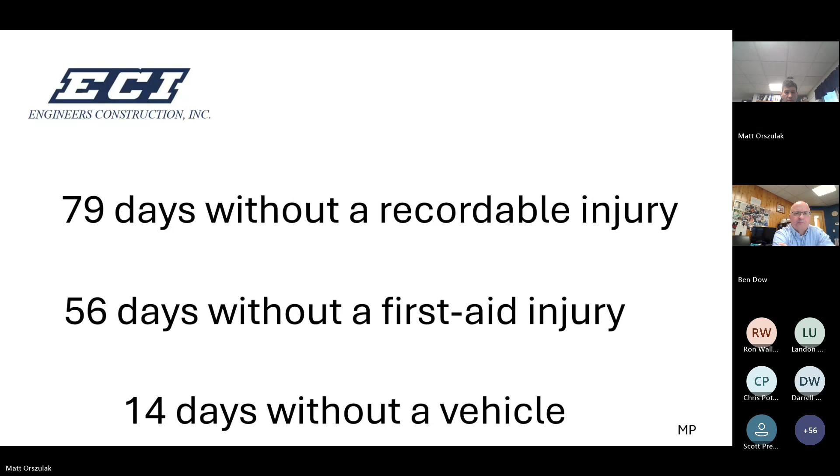So respect the marks is our topic. We're going to have Dave Attic here as a guest speaker next week to talk about Vermont Gas and what they're seeing. There's been a lot of gas leaks by contractors throughout the state so far early in the construction season. Luckily, one hasn't been us, but I thought it'd be good for him to highlight damage prevention.

Things that he's seeing contractors failing to do around Vermont Gas, but other utilities all together in the type of work that we do. So for us, what we can really emphasize and focus on is maintaining marks. Where we historically have seen some failures, it's been marked once, we forget where it was, and then we get into it with an excavator bucket.

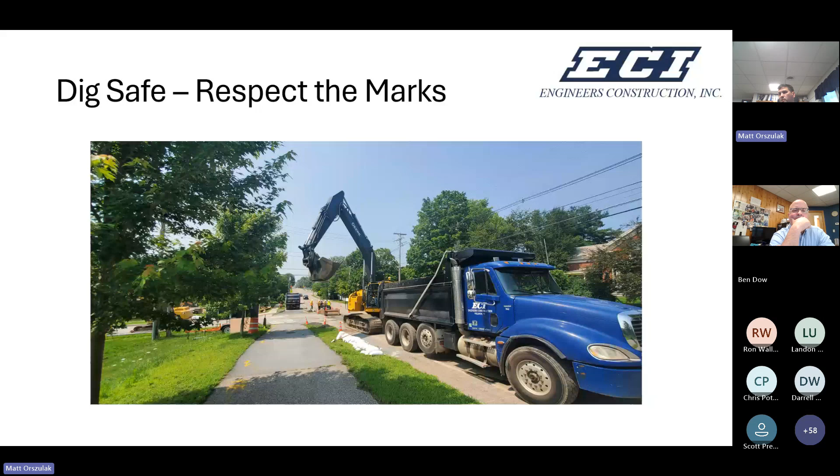Quick little slide here just on the state statute saying that we have to have a pre-mark. Our areas must be pre-marked before we call dig safe, something that we've done pretty good lately. We've definitely had our struggles with it in the past, making sure before we call in a ticket, we pre-mark it. So let's make sure we get those pre-marks done.

And again, go more than you think you need. Say it's a sinkhole and you make it really small and short, and then you start digging down in that area and realize, man, we need this slope way back because this thing's a lot deeper than we thought it was. So take more than you need just so we don't have to have another remark.

Because again, it's 3 days now. The new law is 3 days for underground utility companies to come out and mark out our stuff in our dig safe area. So make sure we're doing the pre-marks. Health and safety can help with that. If you plan ahead well in advance, we can help pre-mark our areas. But just let us know.

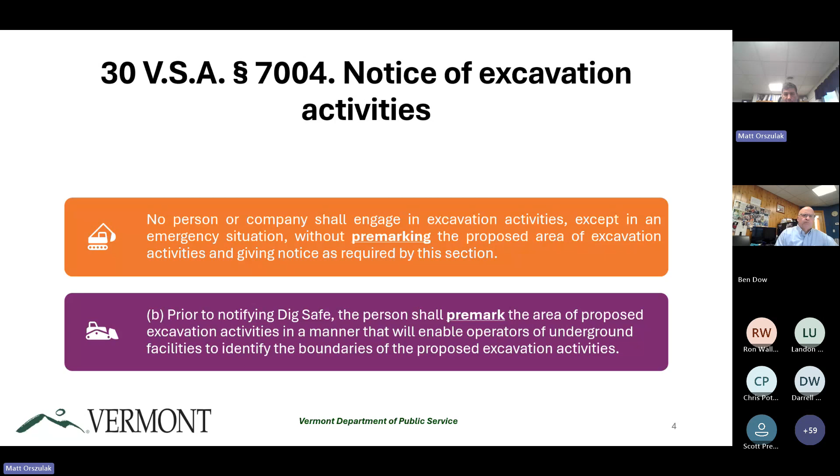So once the utility company comes out and does their thing, Vermont Gas has been there, Centerline's been there for the power and the comm. There's a couple other third-party fiber optic companies that hire people out of Connecticut sometimes, so they are usually the ones that trickle in. Most of that's kind of on the rail though.

But make sure we're holding that pre-construction meeting on site. Let's walk it first, try to take photos, try to get a feel for what you're dealing with. If you do want to have some depths, we have that technology with our underground utilities where we can help give you some depths. Establishing offsets is another good one to do.

And also utilize our GPS equipment. I'm sure if we have rovers available on site we can store some points, be able to reestablish that line utilizing our GPS equipment. As we saw last week, we have quite a bit of good technology there that can help with maintaining our underground utility conflicts.

So how the statute's written in the state of Vermont, and pretty much throughout the United States, it's the contractor's responsibility to maintain the marks. They will come out to refresh our marks, but they get 72 hours for a remark. So if we lose marks because of our mistakes, we could be delayed on our projects a little bit. So let's make sure we're doing what we can: grab photos, put grade stakes in the ground, GPS it, whatever we can do. Create offsets right in your field book so we can reestablish that mark, so we don't get into a power line or a comm line or a Vermont Gas line because we forgot, because that could be a big issue.

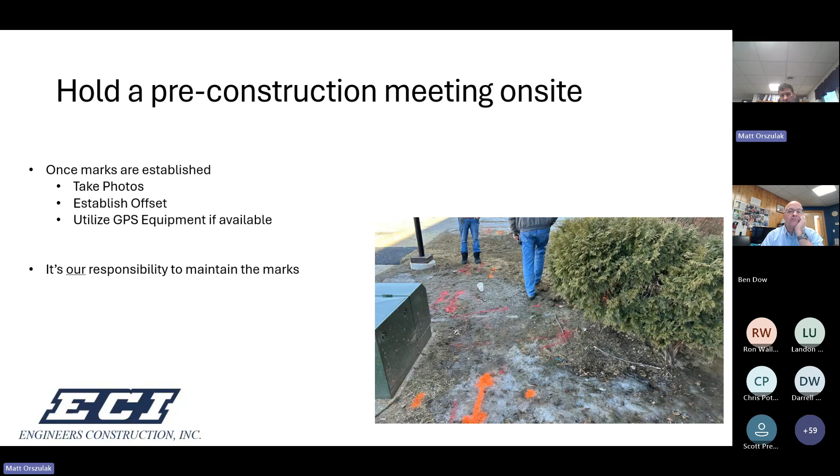We want to really make sure everybody knows the color code system. We do this in orientation, and then we highlight it every year. It should become common knowledge to everybody that when they see a red mark, that's electric. When they see yellow, that's gas. When you see orange markings, that's communication. Blue is your water lines. Green is your drainage and sewer. Pink is for us, for our surveys. And white is for our proposed excavation area. That's the universal color coding system for underground utility locating and proper use.

So we want to make sure we're paying attention to any changes in the direction of the lines. Where you usually get it is when a line does a quick 90 and we're running parallel with it, and it does a 90 into our trench line and we get it that way. So it's always good to hand dig ahead of you, potholing ahead of you, so you can always get depths and line as best we can anytime we're digging, especially if it's a direct buried comm line. There's not a lot of tolerance there.

For damage prevention, make sure everyone is involved and aware of any offsets or marks that have been compromised. If something changes out there, let's make sure we're communicating a good time at the tailboard. Those field books are very good for that as well, with communication and taking good notes, making sure everybody is aware, especially the excavating operator, and especially the person in the trench spotting for the excavating operator.

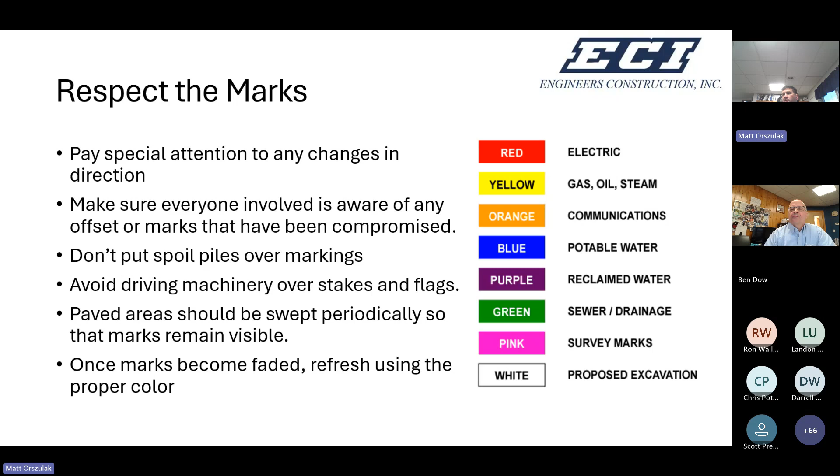Yeah, we have plenty of locating equipment readily available. So if your project has a lot of exposure to an underground utility and you want a locator on site, we will train you how to utilize our plug and play locators for keeping up with the marks, getting depths, and figuring out what is actually the live utility versus what is abandoned. Because that could be a lot of time sunk trying to figure out what that is and where it goes, so there are ways we can expedite that process.

The other thing that's frustrating sometimes is when you find a line and think you have it, but it's an old abandoned one. Then it's not the right one. That happens, just give us a call. We have a lot of contacts and resources at our fingertips that hopefully can get you the answers to your questions pretty quickly.

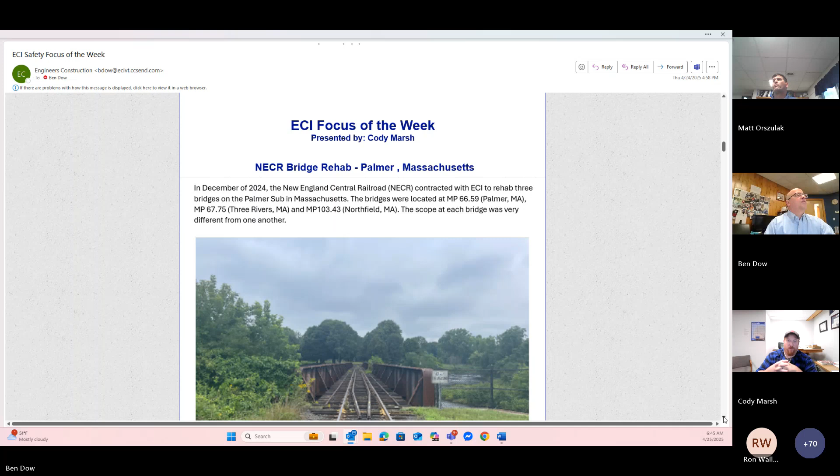Project of the week. Hopefully we're not too focused on my projects. We're going to do a deep dive on your projects. We're going to get some graphs out next week, Cody, see how you're doing. All right, nice. We're in ESOP now, so we all want to know.

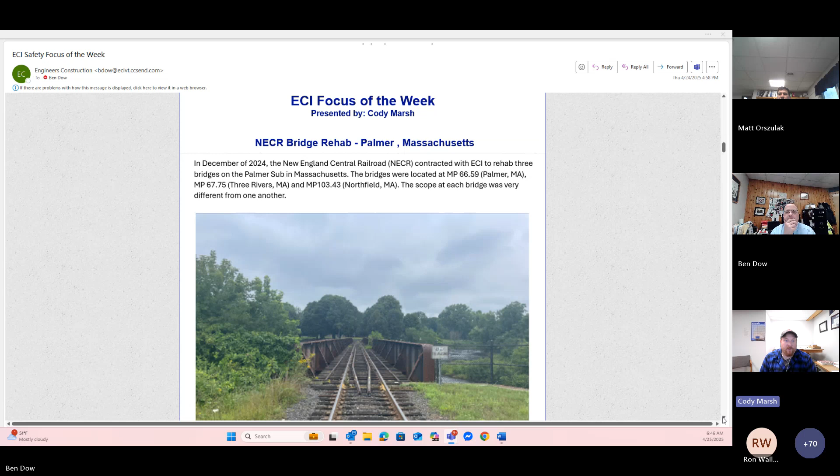This was for the NECR 2024 build grant project down in Massachusetts. In December 2024, the NECR contracted ECI to rehab 3 bridges on the Palmer sub in Massachusetts. The bridges were located at MP 66.59 in Palmer, 67.75 in Three Rivers, and 103.43 in Northfield. The scope at each bridge was quite different from one another.

This is the Three Rivers Bridge here, shown as the existing conditions looked last summer - a pretty beefy-looking through girder bridge. This is just down the road in Palmer, which looks like a lot of the bigger bridges we have in Vermont.

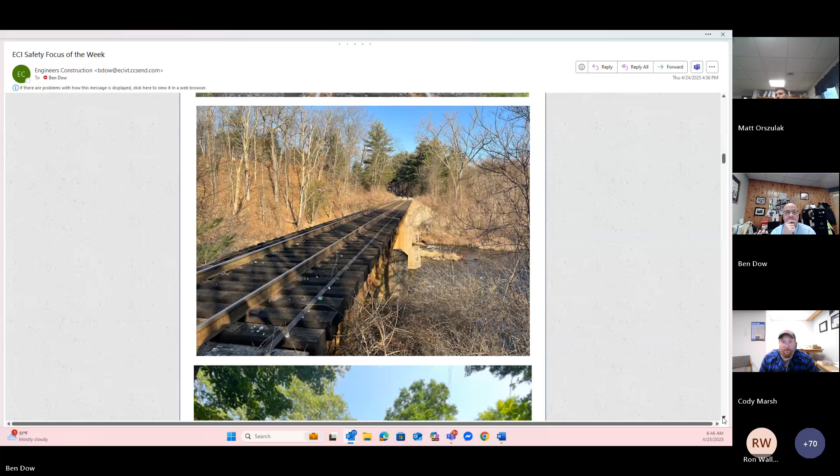And this one was up in Northfield, quite a bit smaller than the other two.

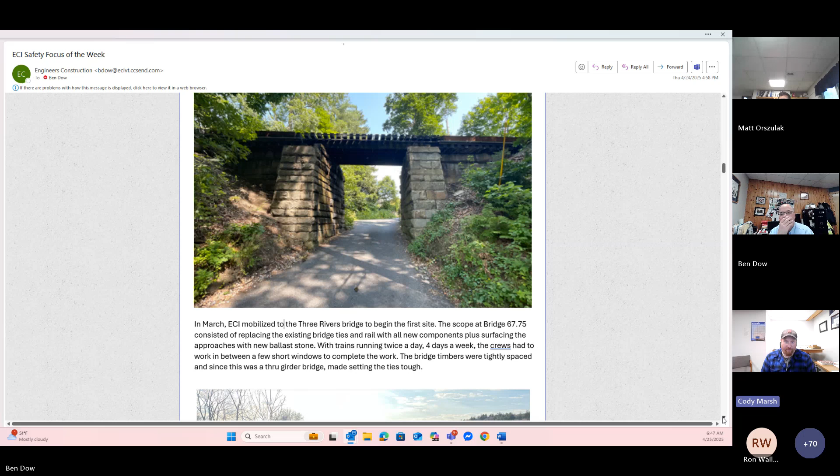In March, ECI mobilized to the Three Rivers Bridge first. The scope at that bridge was to replace the existing bridge ties and rail with all new components, plus surfacing the approaches with new ballast stone. With trains running twice a day, 4 days a week, the crews had to work in some pretty short windows to get the work done.

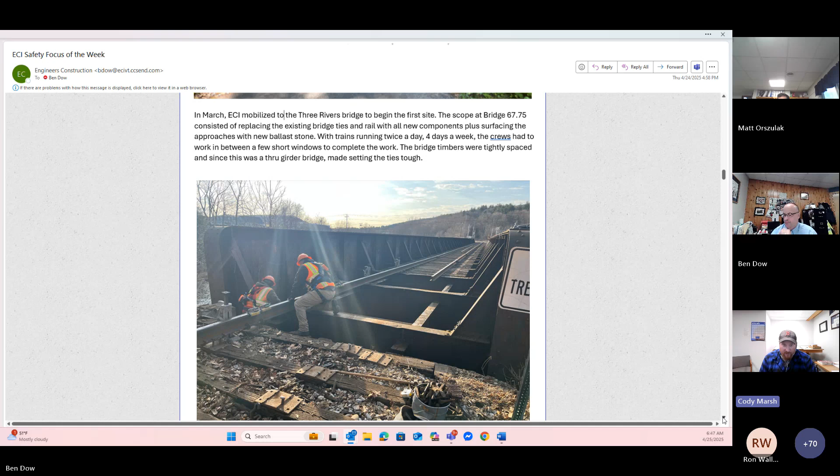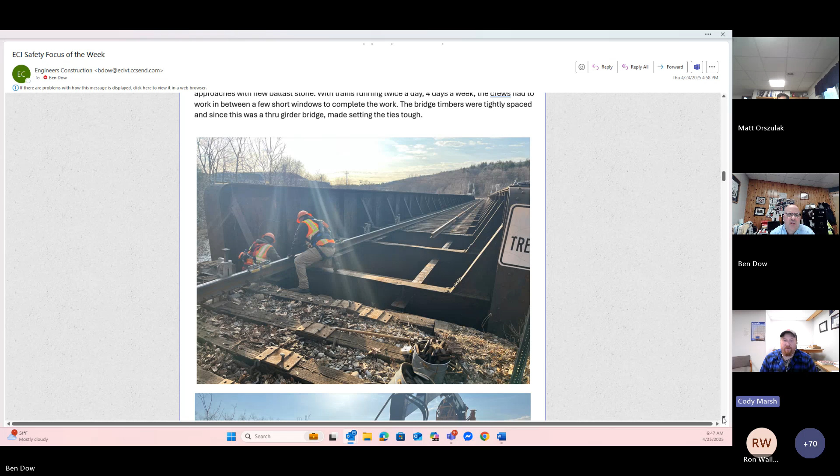The timbers were pretty tightly spaced between the beams on these girders, making it tough to get them in. There's a couple of guys, I think it's Greg and someone else, cleaning out stone and brush from the bridge beams - pretty good attention to detail to make this old bridge look nice. Jake's setting the first tie in there, but it was pretty tough to get that thing snaked in.

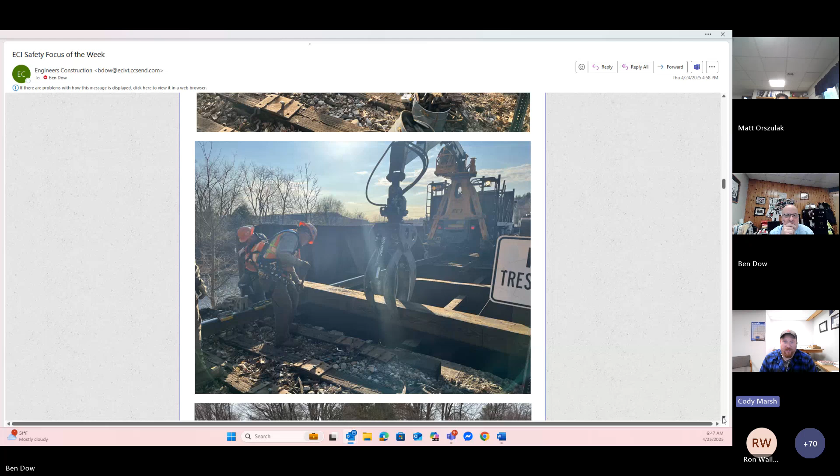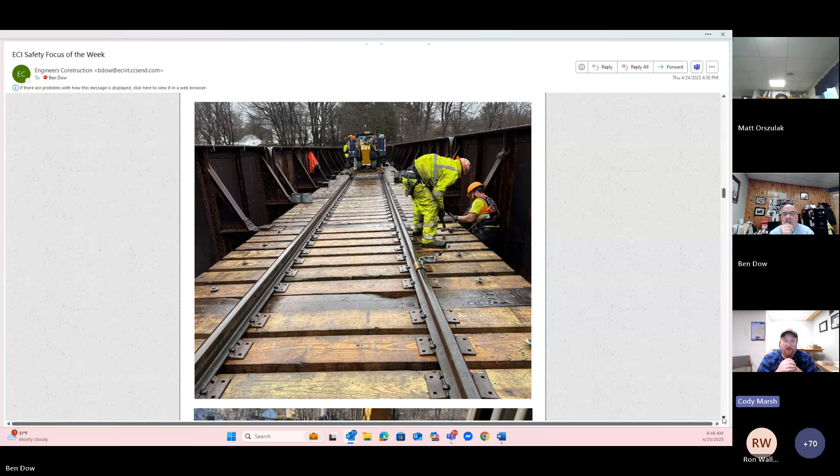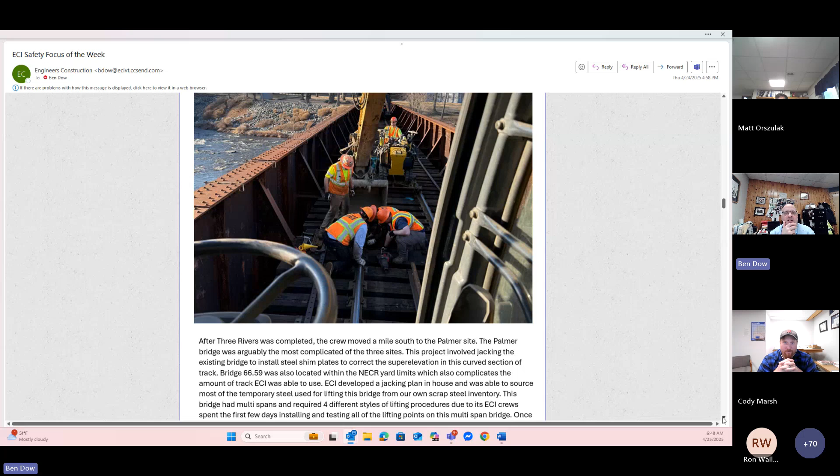And that's with all the new ties and new hardware installed - those are nice looking ties, looks like a brand new bridge. I'm always impressed with how heavy everything those guys touch on the railroad is - those joint bars, rail, the ties. It's pretty nice when you have an operator handy that can move those parts and pieces for you, so they don't have to worry about falling off the side - they've got some nice big steel side rails.

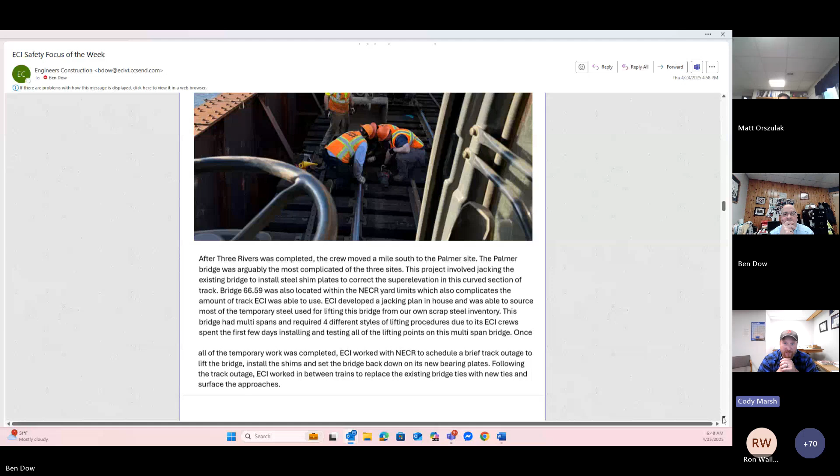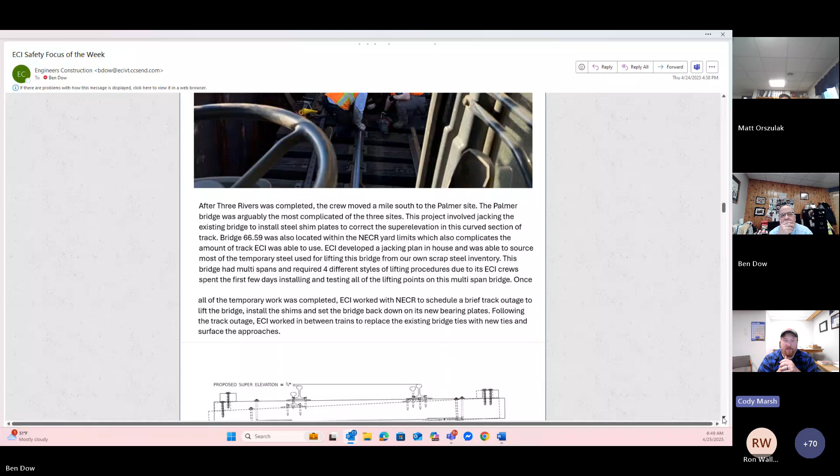After Three Rivers was completed, the guys moved down to the Palmer site, only about a mile south. The Palmer Bridge was arguably the most complicated of the three. This site involved jacking the existing bridge to install new shim plates to correct the super elevation on this curved section of track. This bridge was also located within yard limits, which complicated the amount of track time ECI was able to use.

We developed a jacking plan in-house and were able to source most of the steel for the temporary lifting structure from our scrap steel inventory. This bridge had multiple spans, each requiring 4 different styles of lifting procedures. The first few days, the crew spent getting all the parts and pieces installed and testing the lift points on this multi-span bridge.

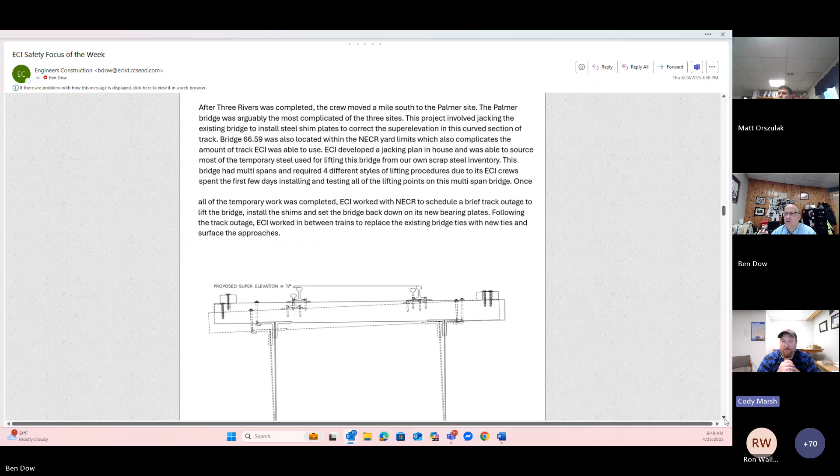Once they got all the temporary work installed, they worked with the railroad to get a brief track outage to lift the bridge up, install all the shims, and set the bridge back down on its new bearing plates. Following the outage, ECI worked between trains to replace the remaining bridge ties and surface the approaches. This was the drawing they gave us of what they wanted to do - basically lift one side up more than the other, shim both sides, then install new anchor bolts through the new plates to the piers.

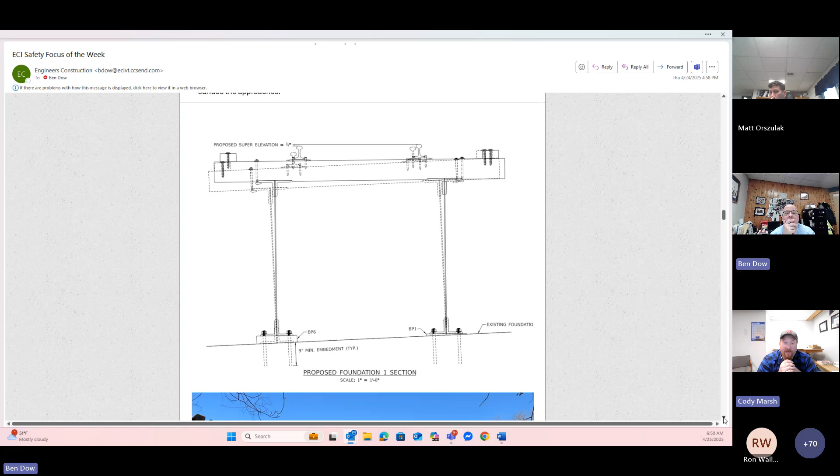They were really reducing the super elevation to only 3/4 of an inch. I didn't get a picture of this, but it's a classic example of drawings not doing it justice - some of those plates were almost 3 inches thick.

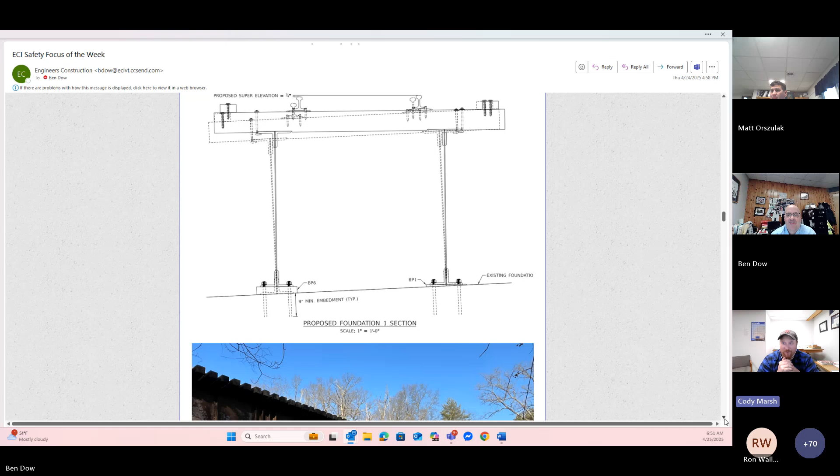Oh wow, I don't know what the total weight of those plates were, but when I saw them in the field, I was like, oh my God, that's an extreme example of how you can possibly underestimate what something is. You think about a 2-inch or 3-inch plate, but you don't really think about it too much until you see it in the field, and you're like, holy crap, that's big, that's heavy. Doesn't look like a plate anymore, it's like a mass.

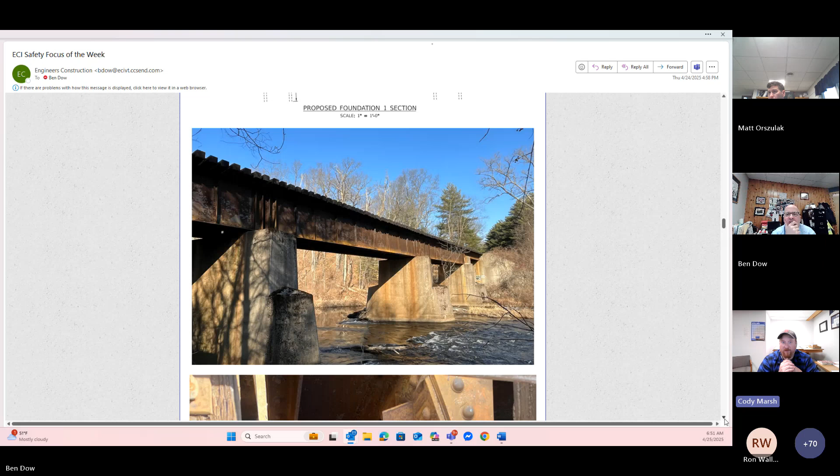This is kind of a side view of the bridge. The first three spans were almost identical to each other, but the fourth span was a little smaller. All the piers were different, and this bridge had quite a skew to it, which added to the complexity of the lifting procedure.

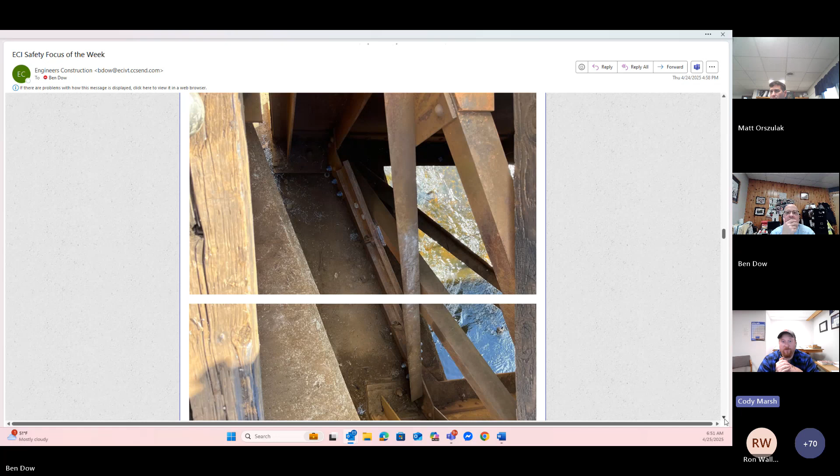It's kind of tough to tell, but looking down through a couple ties to see how to get down in there to get the new channel installed in between these cross bracing. I can see new bolts.

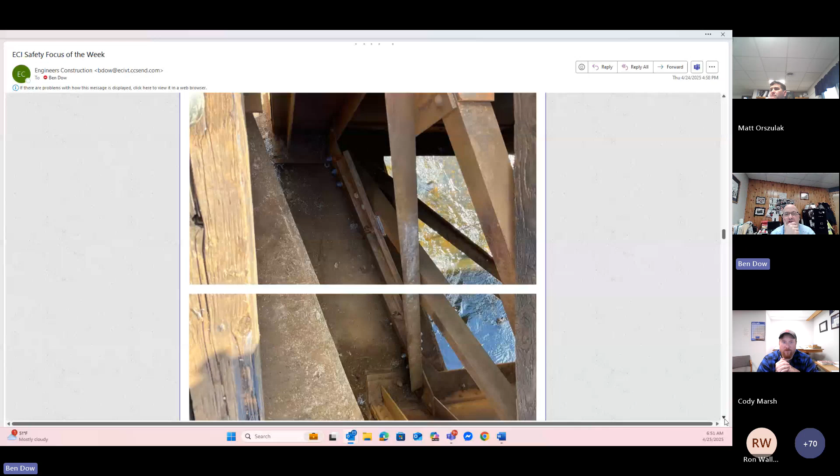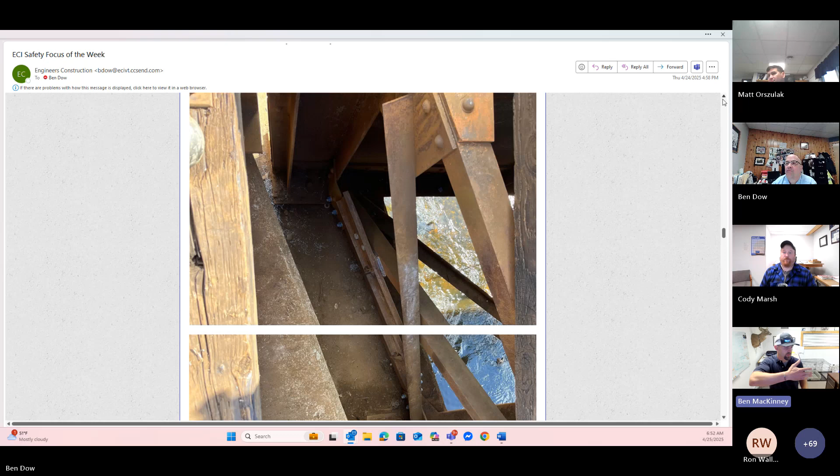Can I chime in? One thing the project team had to deal with was just getting this thing in the air. We were lifting one side more than the other, so that's tough. These deck girder bridges, unlike some through girder bridges that have floor beams going from girder to girder where you can often just get a jack under the floor beam, you have to analyze it to make sure it's strong enough. There's no good way to pick this bridge up, it's just two girders with really light duty cross frames in between. So all the guys spent a ton of time field measuring, engineering, and proving out a jacking plan for this. We do probably 5 or 6 jacking plans a year for stuff like this, and you'd think the VTrans ones are the hard ones because they make you submit like 80 sheets of calcs, but this was probably one of the more complex jacking plans we've done in a long time.

And that's in addition to changing the super elevation dramatically in one section of the bridge, but you can't get it all done before the next train. So there was a lot of working hard to maximize the windows we had, and possibly some temporary shimming and surfacing. The whole job was more challenging than I thought it was originally.

Hey Ben, did they put as much scrutiny when you were working with a railroad? Do they have guys looking at your jacking plans? When you're doing the state, you have to do so much work to submit it, and even when you have a good plan, sometimes they reject it, but at least you got somebody looking at it. Or are we more on our own on the rail? I don't even think they looked at it, I don't even think we gave it to them. But the fact is it's got to work, we've got to do it without affecting the bridge. It can't fail, we can't start bending angles.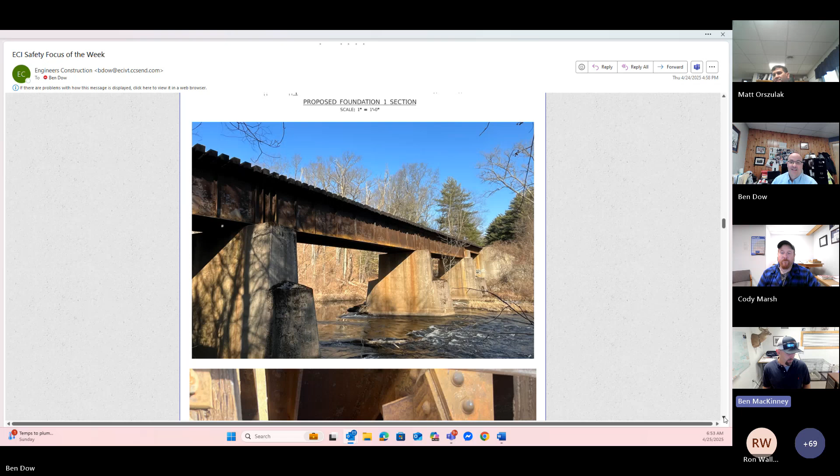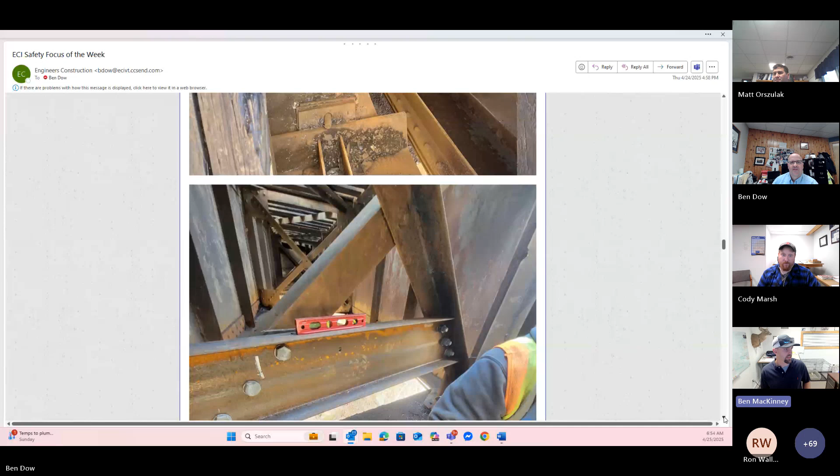In this case, it's a lot of responsibility. Yeah, it is, and the guys here came up with a good plan to get some temporary members installed and bolted up. None of that stuff was in the plans, this is stuff that ECI came up with, and it worked pretty well. That's the ingenuity that you guys do.

It's kind of hard to see the skew, but it's quite dramatic here, you can kind of see on the top those ties at an angle. Can you see an indication of it? This is inside, right? Yeah, so this is down in the pier, on top of the pier.

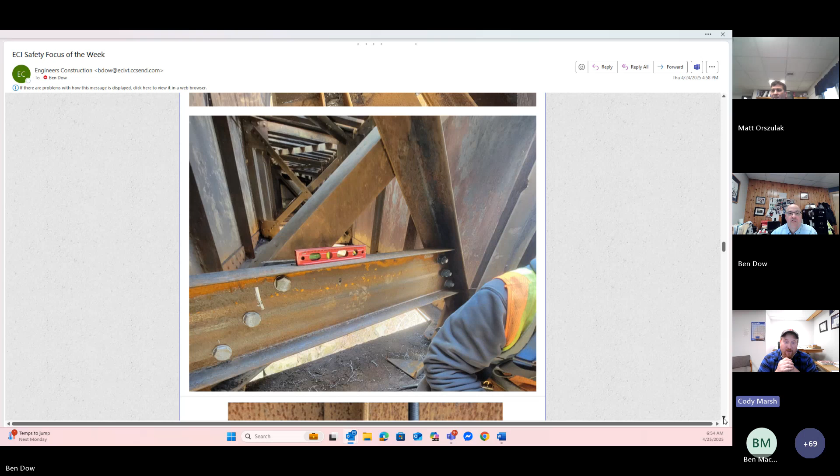Holy cow. So the railroad got a few more stiffeners added to their bridge. Look at that.

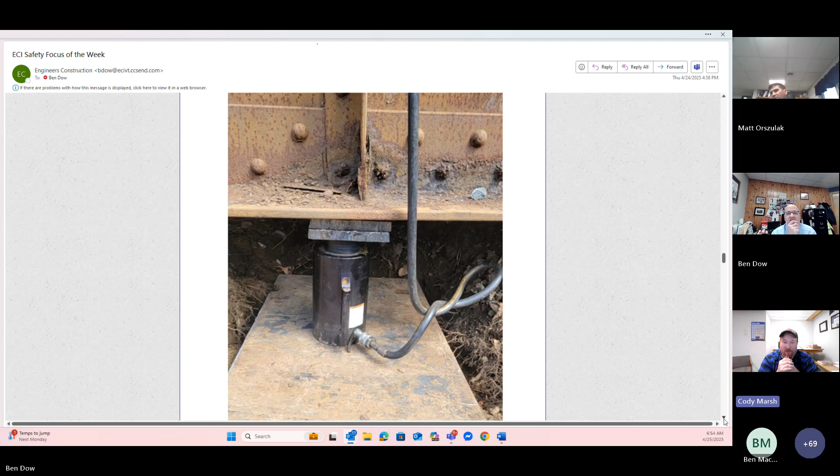At the south end, the girders were actually over land, so we were able to just dig out a little pad there and jack off the soil. That was actually one of the easier spots to lift off of. But right here, wow.

Then once they lifted it all, they replaced all new ties, pulling the old ties off and getting new ones installed.

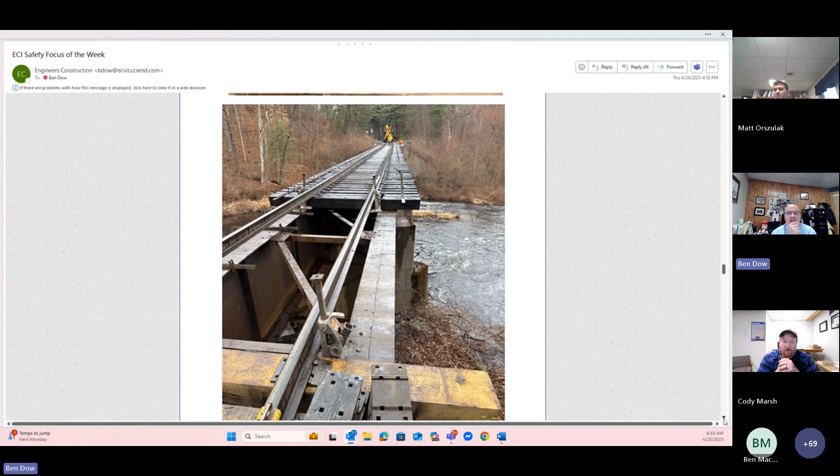That's an old bridge. There was a plaque on it, I don't remember what it said, maybe 1907 or something. It was early 1900s. More nice new ties, I like the new ties on the bridges, they look pretty cool.

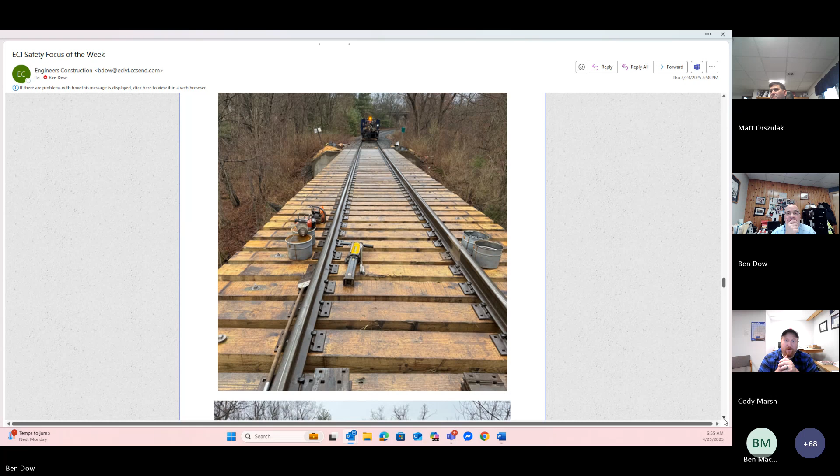This one doesn't have big side rails. No.

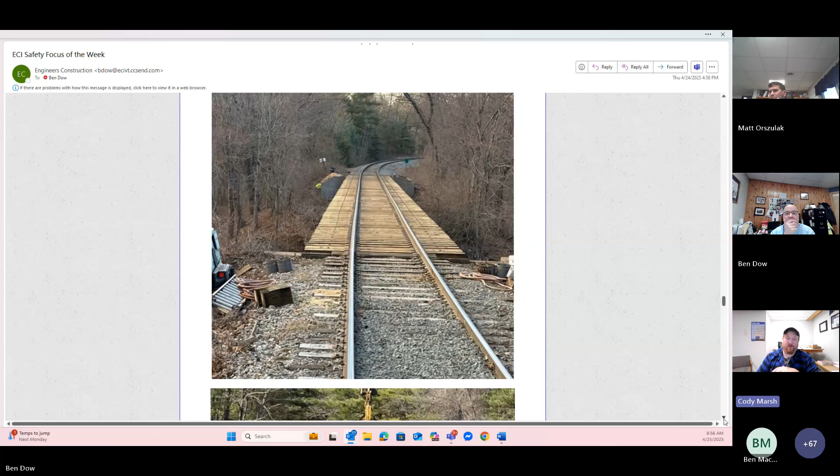Nice. There's a good shot. There's another one. That's all completed. Just then they put in the guardrails and stuff in the last picture. Oh yeah, wow.

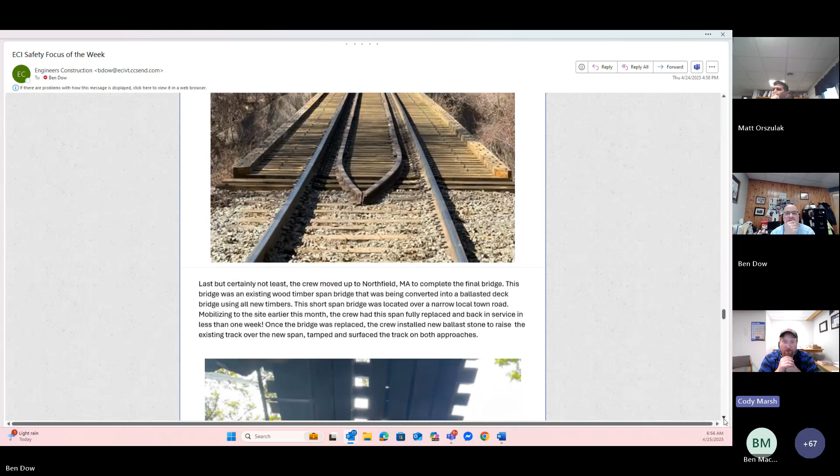Okay, so yeah, that was the big one, and then the last but certainly not least, the crew moved up to Northfield, Mass, to complete this last one. So this was an existing wood timber span that we're converting into a ballasted deck bridge using all new timbers.

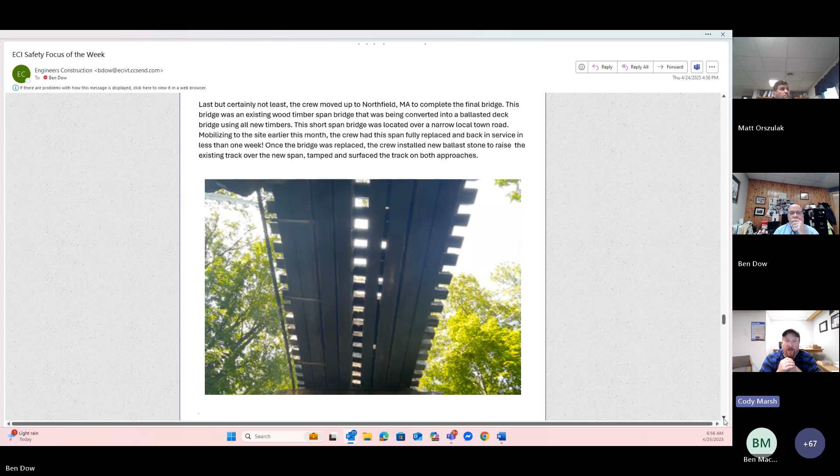This was a short span over a local town road, a narrow town road. We mobilized earlier this month, and the crew had the span fully replaced and back in service in less than a week. Once the span was replaced, the crew installed new ballast stone and raised the existing track over the span, tamped and surfaced the approaches on both sides.

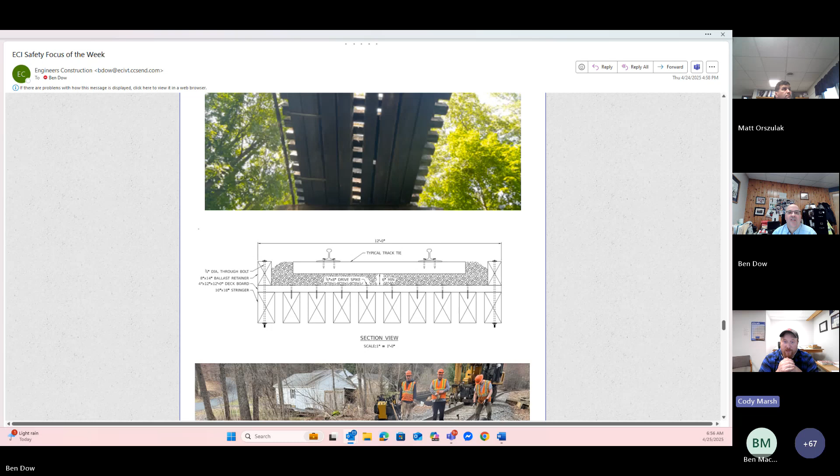So this was the existing bridge, what it looked like, and then this is the detail of what they wanted it to look like, all said and done. Yeah, that one, that's crazy.

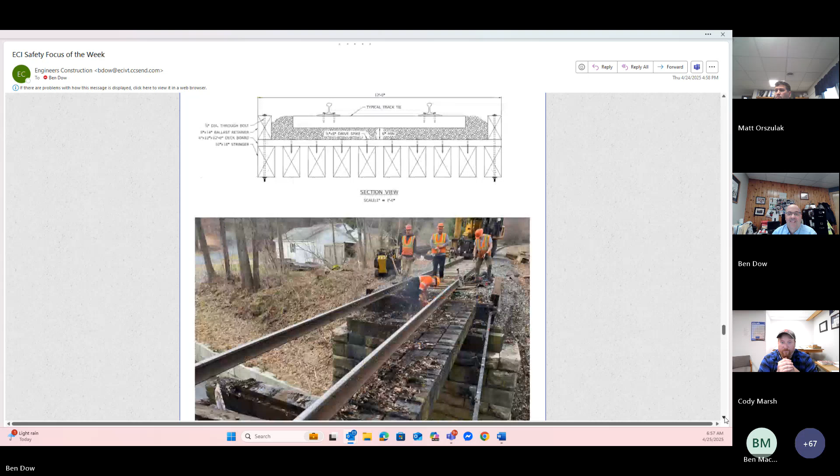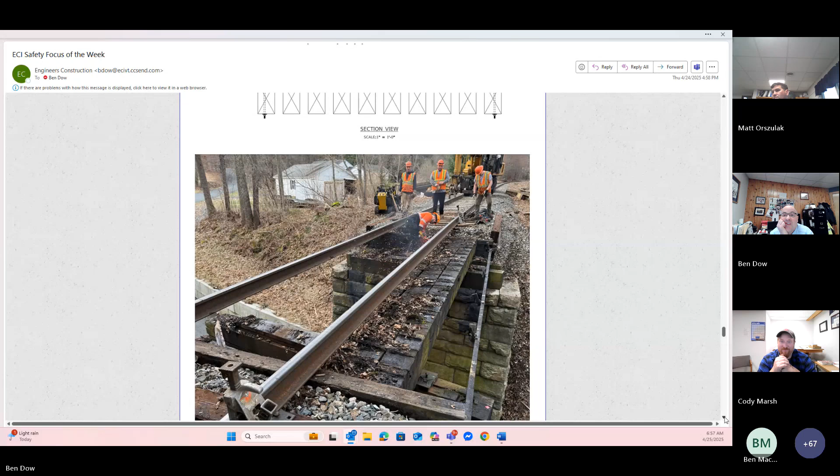So there's the guys dropping the old timbers out of there. They get the rails up there. Just go really fast and maybe you can get over it. Wow, look at that.

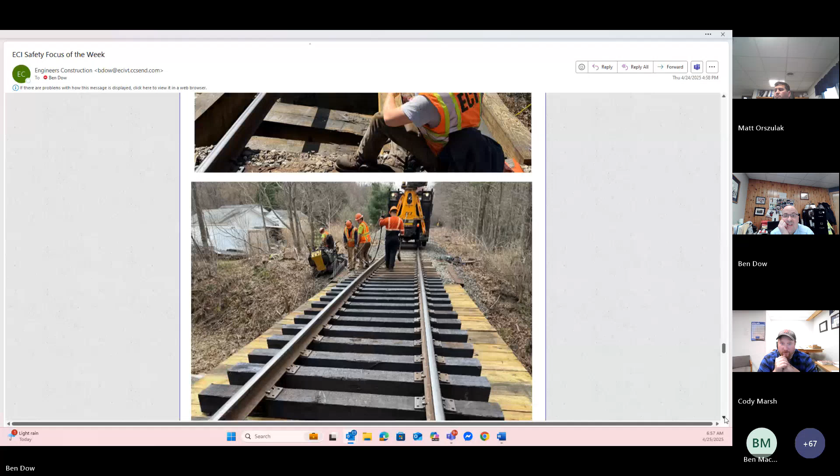Now they've got the deck on, all the ties back. It's a pretty cool wood structure.

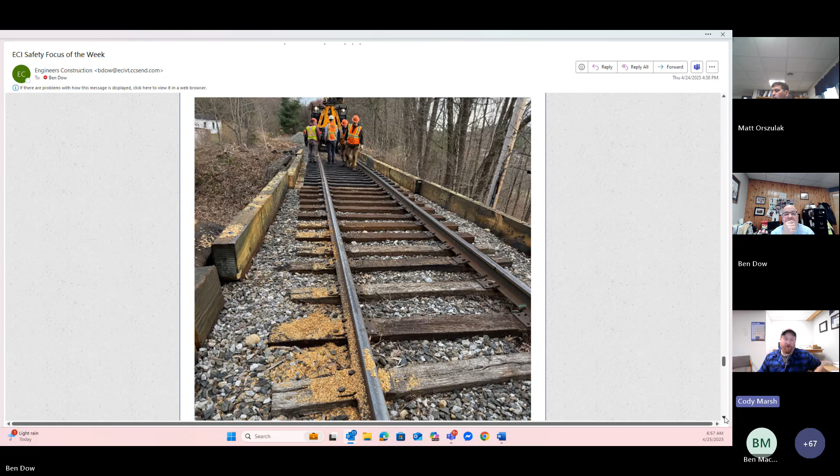And they've got ballast retaining walls basically on the sides. So they fill it full of ballast stone and raise it, look at that, and surface it in both directions. Good to go.

Very nice, so this was a great little project to kick off the year. 100% self-performed by ECI, so it's a great little project, and the guys did a fantastic job and kicked some butt. That's cool, good job.

Oh, you even mentioned that here, don't you? Hey Cody, I was wondering, do you see the resident engineers a lot less out on these jobs that are out in the middle of nowhere? Yeah, I mean I certainly never saw anybody out there. No, I'm kidding. I think I'd have to ask Lee or Ron, but I think they come out and check every now and then. Well, they trust Ron and Lee and all the guys probably a lot more than you think, because they aren't out there checking on us all the time.

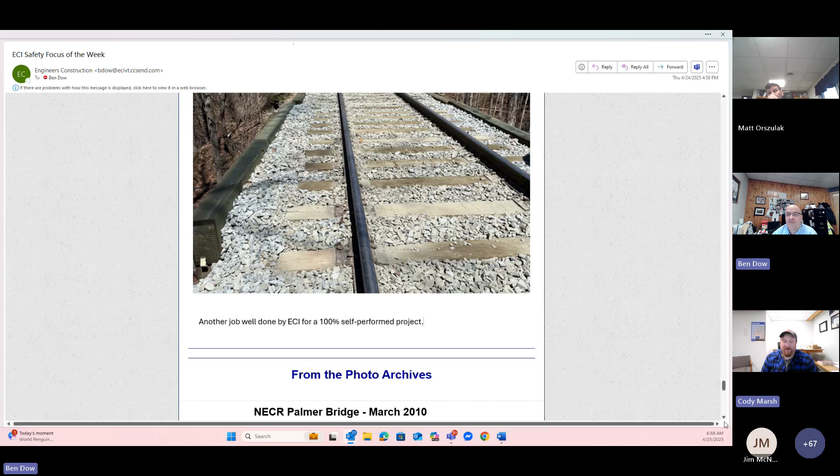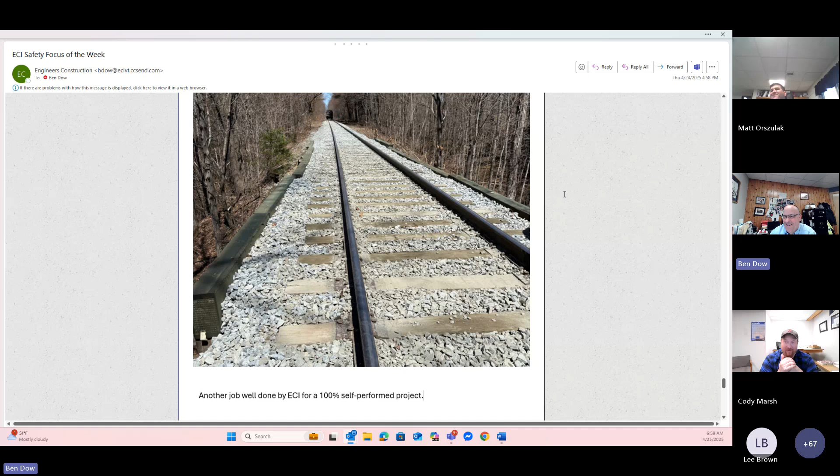There's pros and cons to that. Usually, we don't see anybody, usually all we see is the flagger and he's sleeping in his truck. Yeah, if you don't wake him up, he doesn't release the track and you get more time, right? Oh, we make sure to get him up. The only downside, they do trust us.

The only downside is that we'll have out-of-state contractors come up and do a much lower caliber of work than we do, and the railroad doesn't even realize it. They're not understanding that. So it can be tough to bid apples to oranges with these guys when you've got quality and safety standards up here and these companies from down south don't, and it's just low bid. By the time the railroad notices something, they're already gone, if they ever do. Yeah, or we get paid to fix it later.

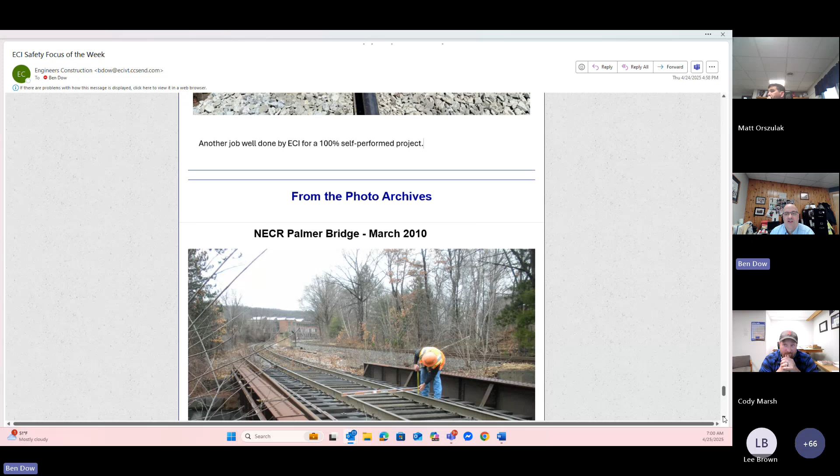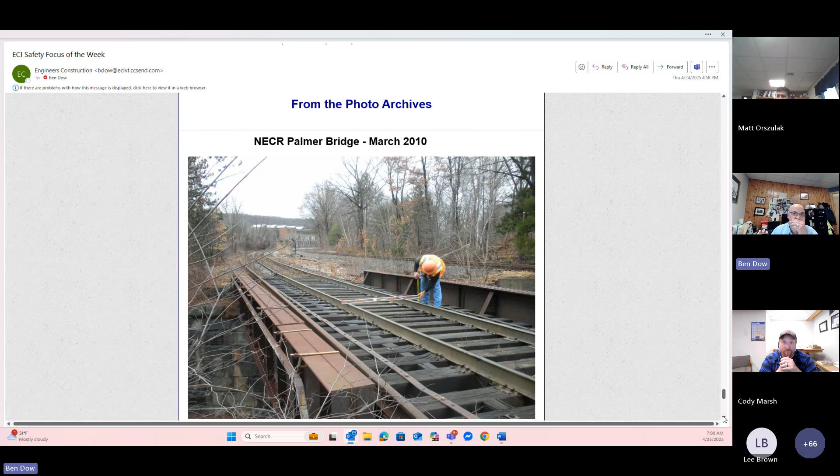So I found this picture. I don't know if you guys know where this one is. I don't know if you know who that guy measuring the super elevation is. I think it's Gene. I don't know how I found this picture, but I found it. Gotta be Gene, just measuring the super elevation, and that was supposedly down in that area of NECR Bridge. That's what the photo was listed as. So that's a few years back.

Cool, all right, I'll turn it back over to Matt. Thanks guys, and good job, Ron and Lee and all the crew.